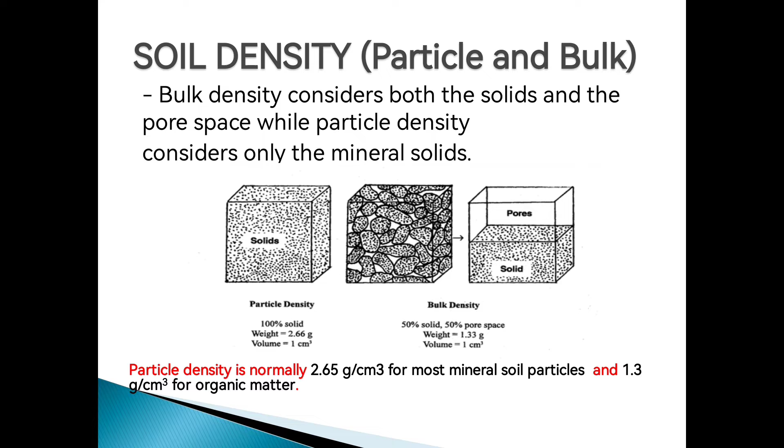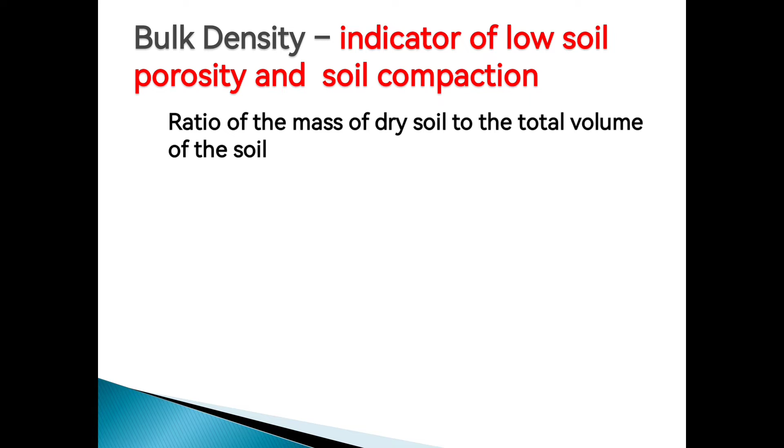So, the particle density is normally calculated as 2.65 gram per cubic centimeter for most mineral soil particles and 1.3 gram per cubic centimeter for organic matter. The bulk density is an indicator of low porosity and soil compaction. This is the ratio of the mass of dry soil to the total volume of the soil. So, total volume of the soil, kasama niya ngayon yung solid spaces at saka yung pore spaces. It is determined by dividing the weight of oven dry soil in grams by its volume in cubic centimeters.

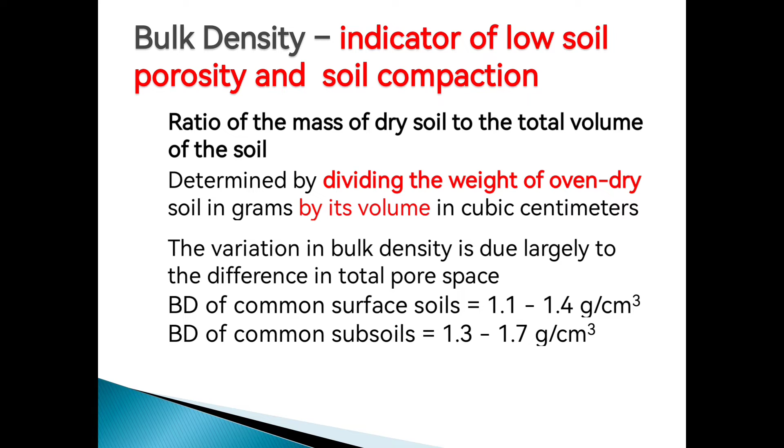And the variation in bulk density is due largely to the difference in total pore space. The bulk density of common surface soil is 1.1 to 1.4 gram per cubic centimeter. Samantalang, as you go deeper, it will be around 1.3 to 1.7 gram per cubic centimeter. So, the more na nagdig ka pailalim, the more na tumataas yung kanyang bulk density, kasi kasama na din dun yung weight na nakapatong sa kanya. So, as you go deeper, your bulk density is going to get higher.

So, ano ngayon yung significance ng bulk density? Bulk density is usually considered in engineering properties, especially pag magpapatayo ka ng mga bahay, ng mga roads. And it is also necessary for the determination of the water movement at saka yung rooting depth ng plants. Kasi pag medyo mataas yung bulk density mo, penetration ng roots at saka yung haba ng roots will also be affected, kasi kung masyadong mataas yung bulk density mo, nagiging compact na yung lupa.

So we know that the bulk density is the oven dry weight divided by the total volume of the soil. So paano ba dinedetermine yung bulk density? We have here the ring cylinder method. This method works best for most moist soils without gravel. So paano nila ginagawa? This is done by preparing an undisturbed flat horizontal surface in the soil with a spade at the depth you wish to sample.

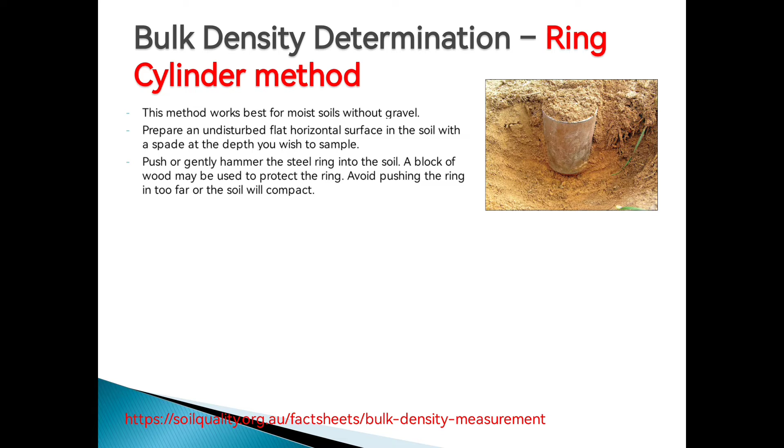And then push or gently hammer the steel ring into the soil. A block of wood may be used to protect the ring. Avoid pushing the ring in too far, for the soil will compact. So wag mong idiin masyado kasi magiging compact na yung lupa. And then you excavate around the ring without disturbing or loosening the soil it contains and carefully remove it with the soil intact.

Remove any excess soil from the outside of the ring and cut any plants or roots off at the soil surface with scissors. And then you pour the soil into the plastic bag and seal the bag, marking the date and location where the sample was taken.

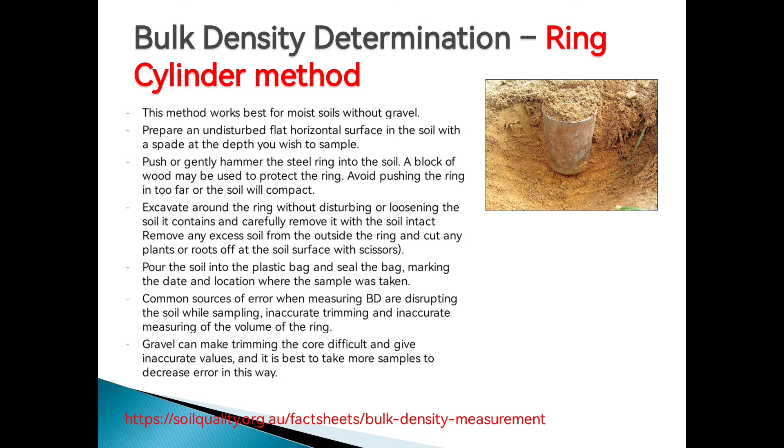And isa sa mga common source ng error when measuring bulk density are na di-disrupt yung soil while sampling. So, ang nangyayari, nagkakaroon ng inaccurate trimming and inaccurate measuring of the volume of the ring. So, gravel, kung may mga bato, can make trimming the core difficult and give inaccurate values. So, it is best to take more samples to decrease error in this way.

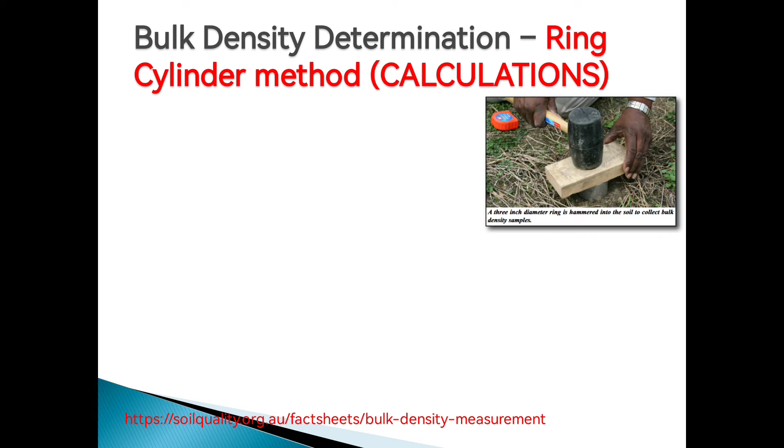Kung yung cylinder method. So, to calculate the volume of the ring, we measure the height of the ring with a ruler. And then you also measure the diameter of the ring and half this value to get the radius. So the ring volume will be 3.14, which is pi r squared, times the height.

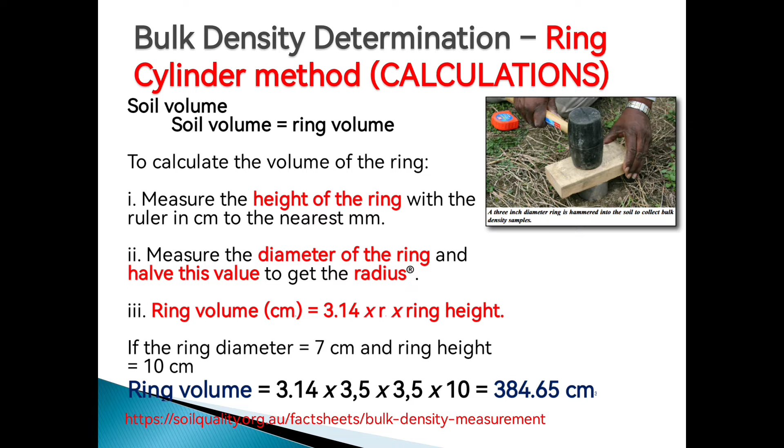So if the ring diameter is 7 cm and ring height is 10 cm, the ring volume would be 3.14 times 3.5 squared times 10, which is around 384.65 cubic centimeters.

So, ngayon, yung lupa na nakuha nyo, you weigh an oven-proof container in grams, so empty, wala pa siyang laman, and then you carefully remove all soil from the bag into the container. You dry the soil for 10 minutes in the microwave or for 2 hours in a conventional oven at 105 degrees Celsius. You let it cool down, and when the soil is dry, you weigh the sample on the scale.

So, since meron na tayong weight in the first time, which is the empty, and then we also have the oven dry weight, so pwede na natin makalculate ngayon yung soil weight. So, we just calculate the second weight minus the first weight. So, meron tayong 425 grams na soil. Assuming na ganito yung value ng weight natin, ha?

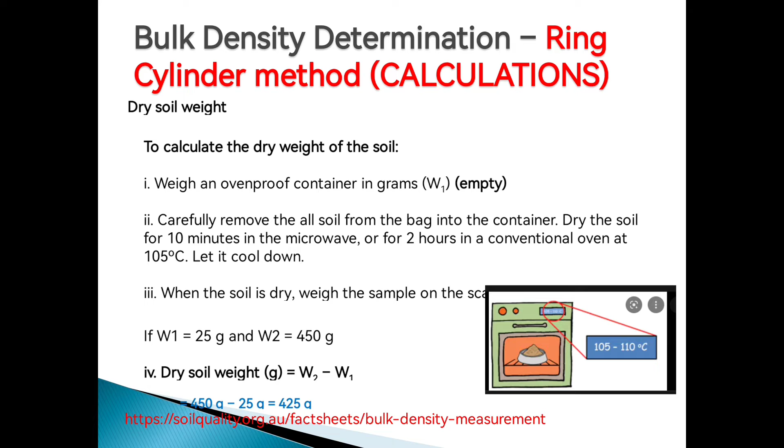So, to calculate the bulk density, we know that it's the oven dry weight over the total volume of the soil. So, for this kind of soil, based sa example natin, our bulk density is 1.1 gram per cubic centimeter. So, this is just an example.

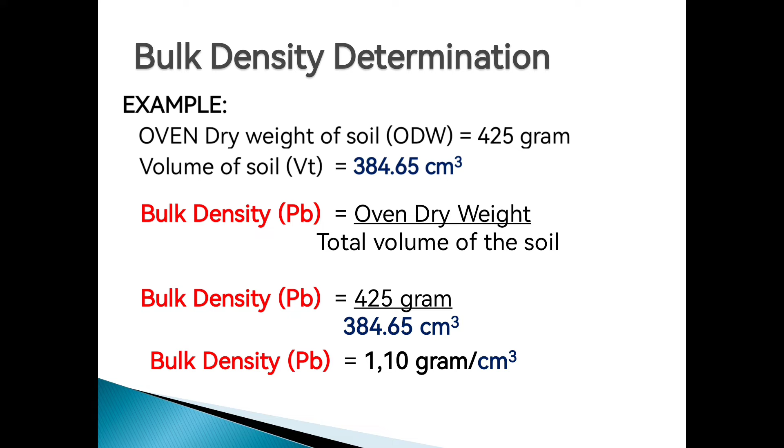Okay, so I hope you follow this, guys. I'm going to show you more calculations later on para ma-practice natin siya. But then, I just want you to know the concept how to calculate the bulk density. So, bulk density is oven dry weight over the total volume of the soil.

And then we also have another method to determine the bulk density, which is the use of a penetrometer. It is an easy and reliable method for determining in-place soil strength and great for checking building pads, excavations, or potential building sites. It simply measures the penetration and you look up soil strength on the strength chart included with the unit. So, itutusok niya lang dyan yung penetrometer sa ilalim ng lupa, and then it will give you information on how strong your soil is.

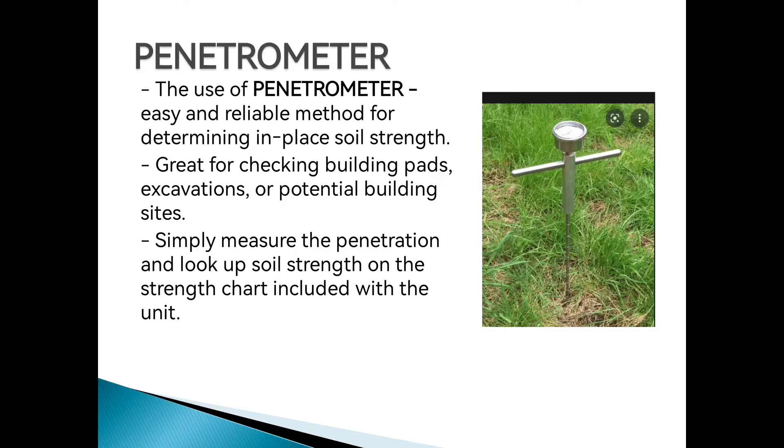And ito naman yung mga bulk densities that restrict root growth. So, ibig sabihin, if you have a sandy soil and your bulk density is higher than 1.8, there will be a problem with your roots, your plants, kasi mahihirapan yung roots mo to penetrate the soil kasi matigas siya. So, sandy is more than 1.8, silty is more than 1.65, and clay is more than 1.47.

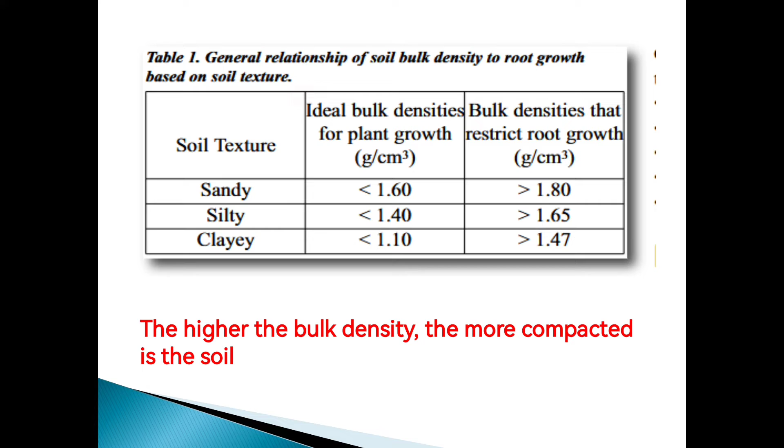So, the higher the bulk density, it will give you an idea that your soil is highly compacted. The higher the bulk density, the greater is your soil compaction.

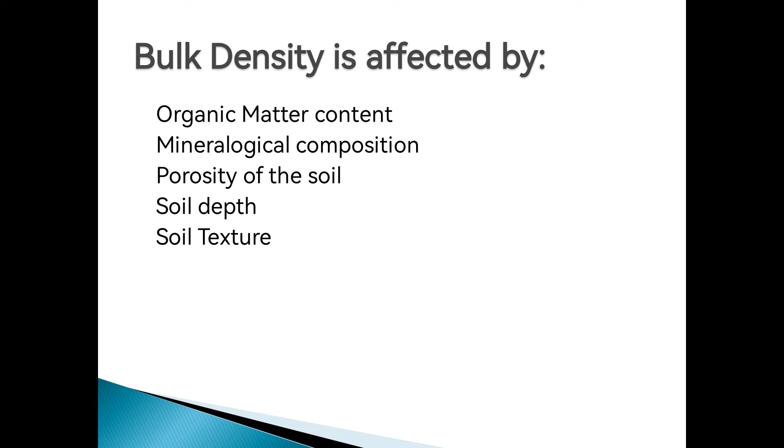So bulk density is affected by organic matter content, mineralogical composition of your soil, porosity, soil depth, and the soil texture. It is dependent on soil texture and the densities of the soil minerals kasi iba-iba yung bulk density ng sand, silt, and clay, as well as ng organic matter particles, at saka kasama na rin yung kanyang packing arrangement.

So as a rule of thumb, most rocks have a density of 2.65 gram per cubic centimeter. So ideally, a medium textured soil with about 50% pore space will have a bulk density of 1.33 gram per cubic centimeter. So yung particle density, guys, mostly standard siya.

Usually yung sa mga calculations natin, ginagamit natin dyan is 2.65 gram per cubic centimeter. So generally, loose, porous soils and those rich in organic matter have lower bulk density. So pag mababa yung bulk density natin, less din yung compaction ng soil. So less compaction, meaning hindi mahihirapan ang roots ng mga tanim nyo to penetrate in the soil.

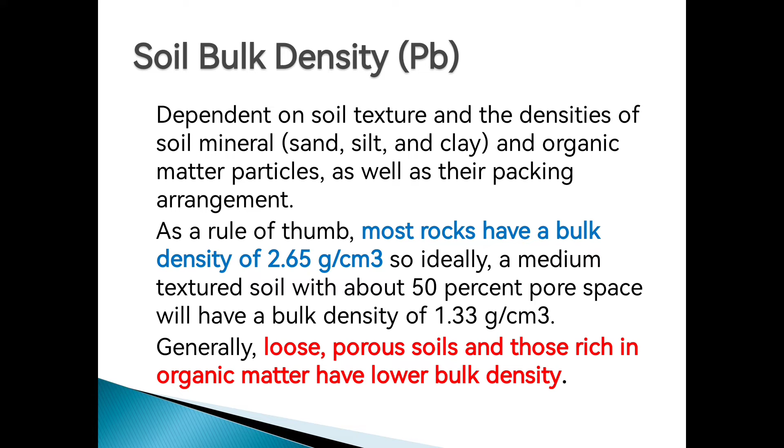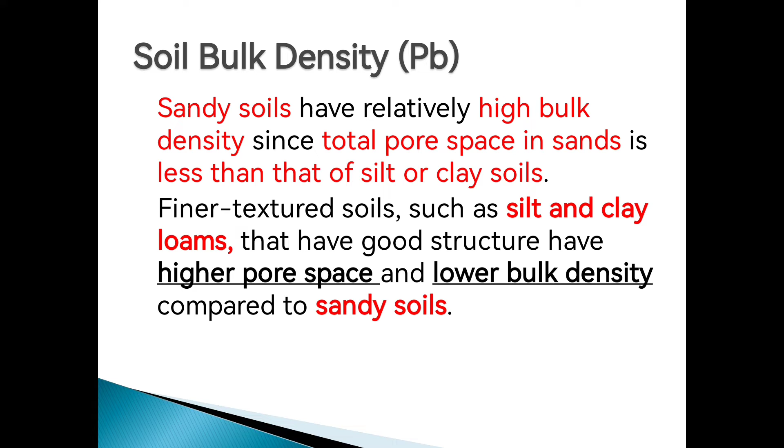Sandy soils have relatively high bulk density since the total pore space in sands is less than that of silt or clay soils. So, mas mataas yung bulk density ng sandy soils. So, mas prone siya ngayon sa compaction ang sandy soils compared ngayon sa clay or silty soils. Finer textured soils such as silt and clay loams that have good structure have higher pore space and lower bulk density compared to sandy soils.

And bulk density typically increases also with soil depth because the subsurface layers have reduced organic matter, aggregation, and root penetration compared to surface layers and therefore contain less pore space. Also, the subsurface layers are also subject to the compacting weight of the soil above them. So, syempre, naiipit din siya doon. So, yung weight ng ibabaw na lupa, nag-a-add din siya ng weight dun sa subsoil. Kaya nagiging mas compacted na yung subsoil mo.

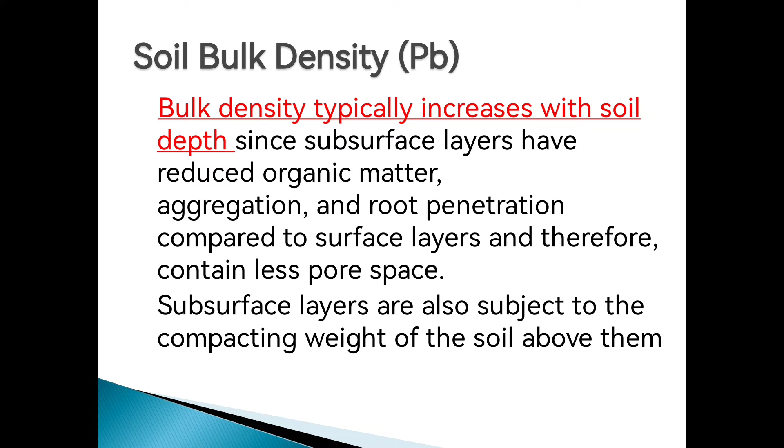And bulk density affects water and air transport in soils, kaya it's very important property ng lupa. And soils with high densities resist water and air transport. And soils with high density may also impede root growth kasi hindi siya nakakapag-penetrate. And a lot of human activities also affect bulk density. So tayo din mismo as mga tao, we also cause the compaction of the soil through our own different activities.

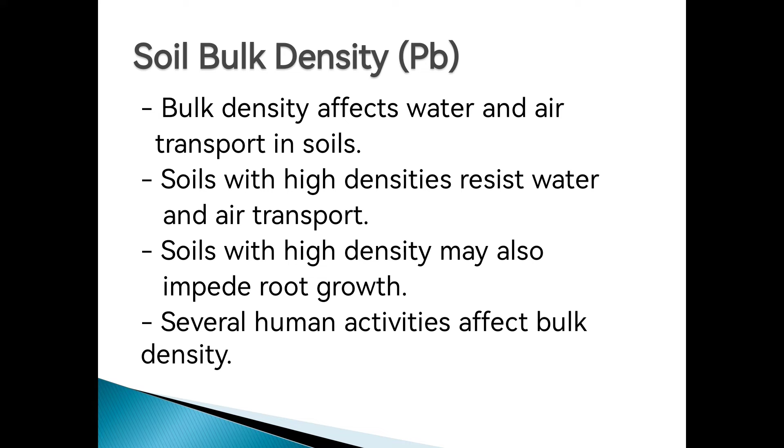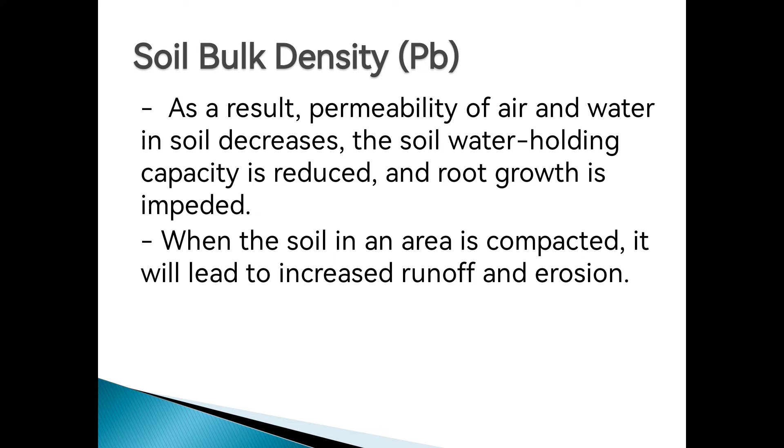Soils at construction sites are generally compacted as a result of excavation, mixing, stockpiling, or equipment storage and equipment traffic. So when soil is compacted, the porosity decreases and bulk density increases. As a result, the permeability of air and water in the soil decreases. So, hindi masyadong nakakapag-penetrate yung air at saka water. And the soil water holding capacity is reduced and root growth is impeded. And when the soil in an area is compacted, it will also lead to increased runoff and erosion. So, marami siyang effect, guys, pag compacted yung lupa.

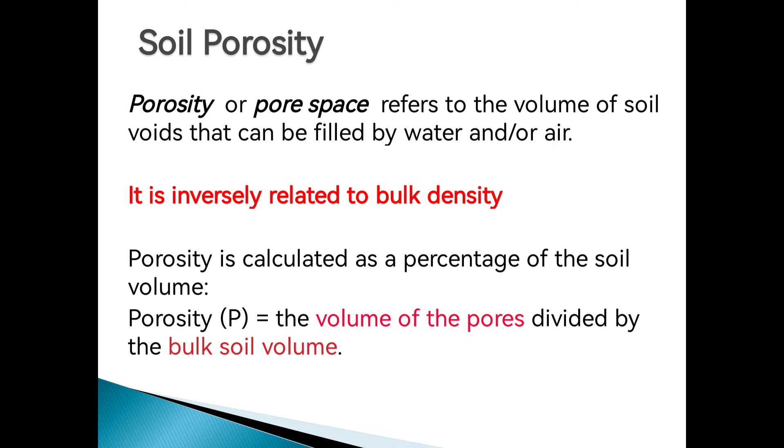Then we also have soil porosity. The porosity or pore space refers to the volume of soil voids that can be filled by water and/or air. It is inversely related to bulk density. So meaning, kung mataas yung inyong pore spaces or percent of porosity, mababa naman ngayon yung bulk density mo. Meaning, less yung compaction mo pag mataas yung porosity. So porosity is calculated as a percentage of the soil volume, the volume of the pores divided by the bulk soil volume. So pore space is very important for providing aeration and paths for water to flow and be stored.

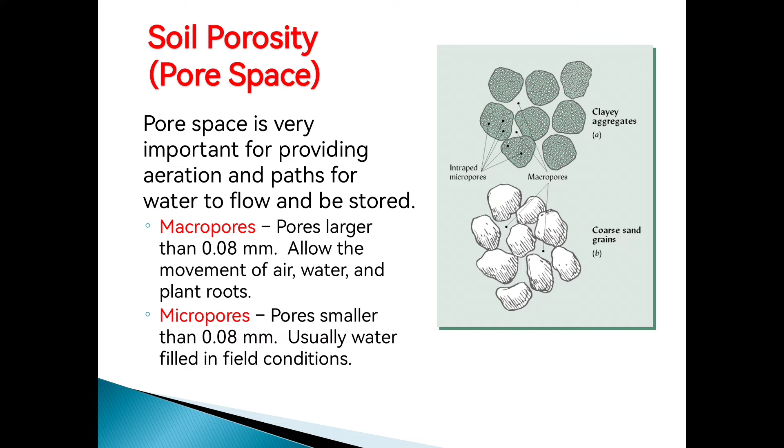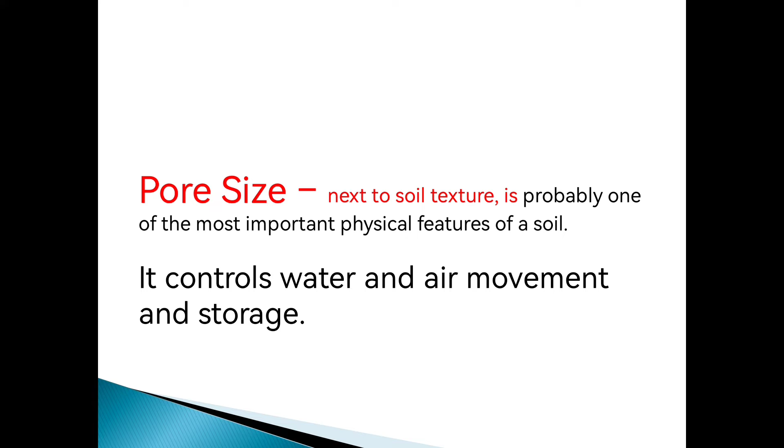So before natin yan sagutan, we are going to compare this pore space in sandy soil versus clay soil. So, imagine a glass baso. Punuin niyo siya ngayon ng sandy soil, sa left side. And then, yung isa namang baso punuin niyo ng clay soil. Kung pupunuin natin yung baso na yan, siguro ilang dampot mo lang ng sandy soils, ilalagay mo siya sa baso, napuno mo siya kaagad. Samantalang sa clay soils, makakailang dampot ka niyan kasi matagal mo siyang mapuno.

It's because the sandy soils have larger pores kasi medyo malalaki yung kanyang mga texture. While yung clay soils, marami siyang mga smaller pores. So, sa sandy soils, there will be less total pore volume, meaning, nagiging less yung kanyang porosity. Samantalang sa clay soil, since maliliit yung kanyang mga pores, there will be greater total pore volume, kasi kahit maliliit yung kanyang mga pores, marami ka namang mga clay materials na nilalagay doon, and each of them have small pores, kaya kung itotal mo lahat ng mga pores sa clay particles, it will create the greater total pore volume. So, mas mataas yung porosity ng clay soils compared to sandy soils.

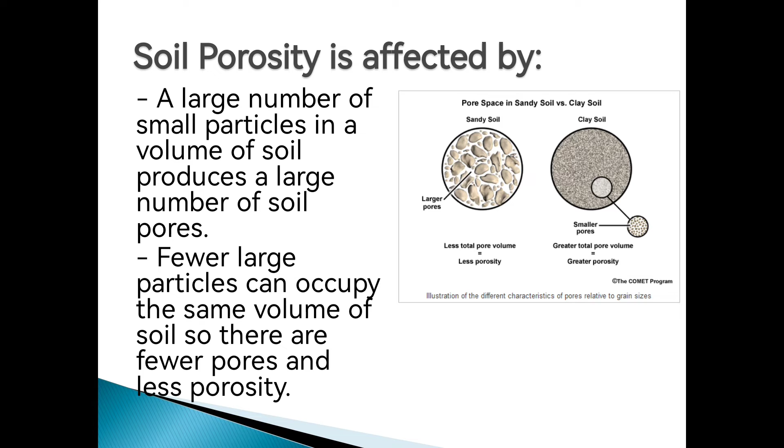So, nasabi ko nga, a large number of small particles in a volume of soil produces a large number of soil pores, and fewer large particles can occupy the same volume of the soil, so there are fewer pores and less porosity. Kaya, mas mataas yung porosity ng clay soil compared to sandy soils.

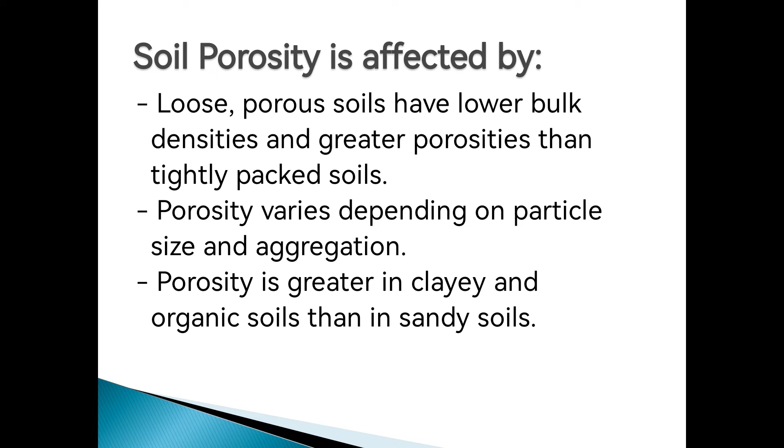So, loose porous soils have lower bulk densities and greater porosities than tightly packed soils. And it also varies depending on the particle size and aggregation, and porosity is greater in clayey and organic soils than in sandy soils. So, paano natin kinakalculate yung porosity? So, this is the portion of soil occupied by water and air. So, both water at saka air.

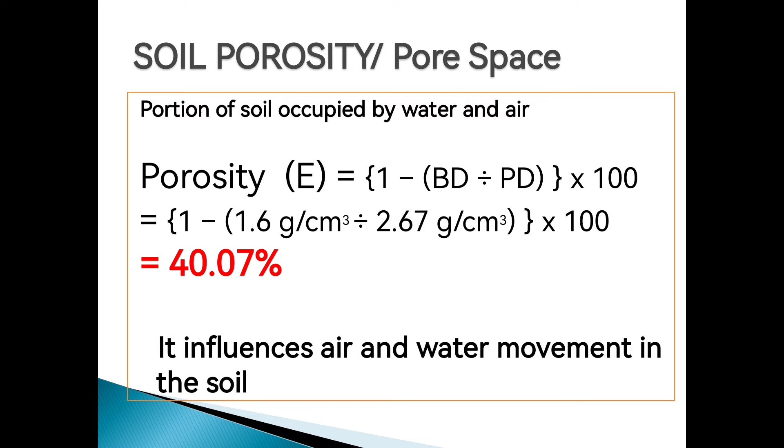So, the porosity, which is usually E, is calculated by 1 minus the bulk density divided by the particle density times 100. So, kung meron ka ngayong 1.6 gram per cubic centimeter na bulk density, you divide it by 2.67 or 2.65 gram per cubic centimeter times 100. So, you will have now a porosity of 40.07%. And porosity influences air and water movement in the soil.

And we also have a bearing capacity, which is determined by soil texture. So this is the ability of the soil to withstand a load or the average load per unit area that will cause failure by rupture of a supporting soil mass. Kaya, in engineering purposes, they usually calculate the strength of the soil at kung ano yung strength ng material na ilalagay mo dun sa soil. Kasi, you cannot just build ilang stories ng building kung yung lupa mo naman is hindi niya kaya ngayong i-sustain yung weight ng building na ipapatayo mo.

So, they also do stabilization. Soil stabilization is a method that prevents a soil system from moving under a load. And the compaction is also very important because it increases the density, thereby increasing stability, and usually applies large pressure to soil at optimum moisture.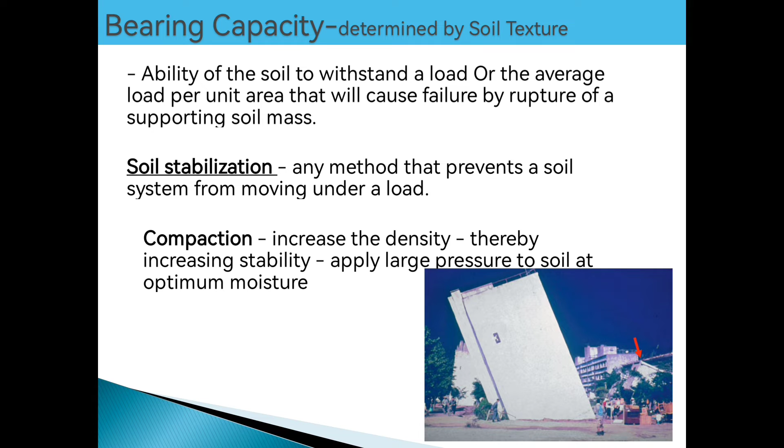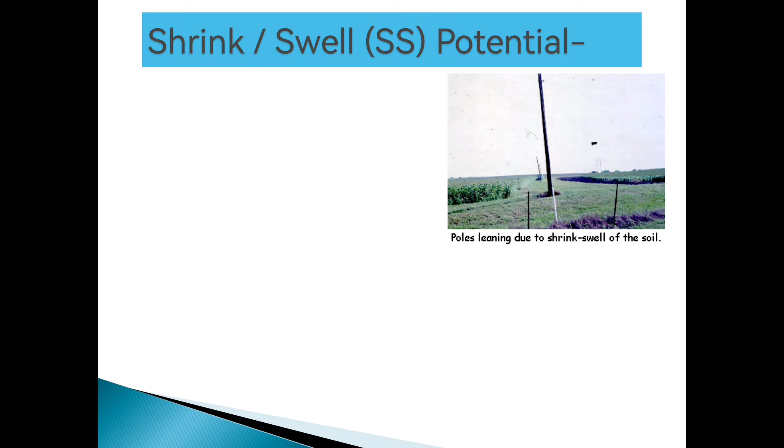And we also have the shrink swell potential. We abbreviated it as SS because may mga iba't ibang lupa, particularly some kinds of clay, has the high potential of shrinking and swelling. So, yung iba dyan nagka-crack. So, kaya it's very necessary to identify anong klase ng lupa ang meron ka, especially kung you are going to build a lot of high-story buildings dun sa lupa na yon.

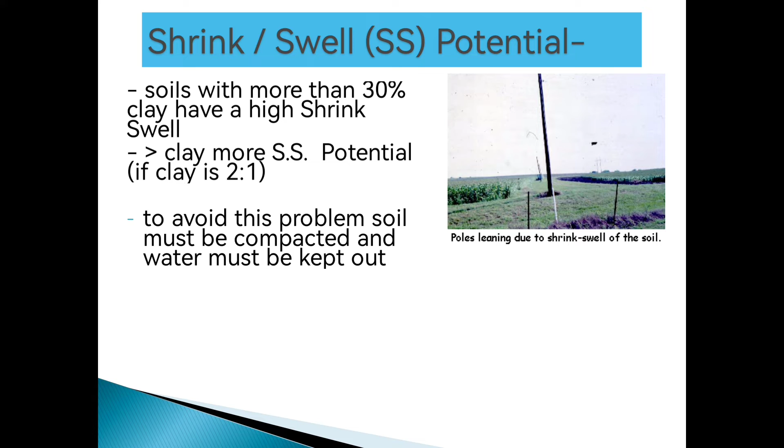So, soils with more than 30% clay have a high shrink-swell capacity. Ibig sabihin, pag mataas yung clay content mo, mas mataas din yung shrink-swell potential, lalo na pag yung mga clay mo is 2:1 expanding type. And to avoid this problem, soil must be compacted and water must be kept out. And without the above, shrink swell will crack foundations and pavement or move telephone poles.

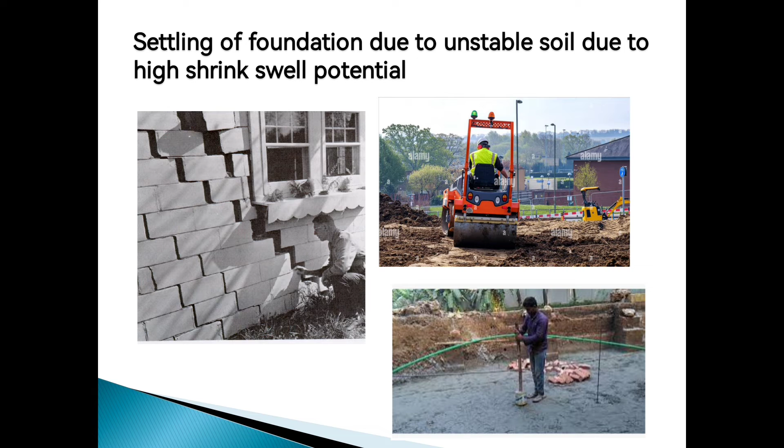So, soil stabilization is a process by which a soil's physical properties are transformed to provide long-term permanent strength gains. It is accomplished by increasing the shear strength and the overall bearing capacity of the soil. And how to do this? They apply lime, cement, Portland, and pozzolan with high silica volcanic ash as chemical additives. And the lime is the most effective on clay soils and can be used in combination with cement and pozzolan.

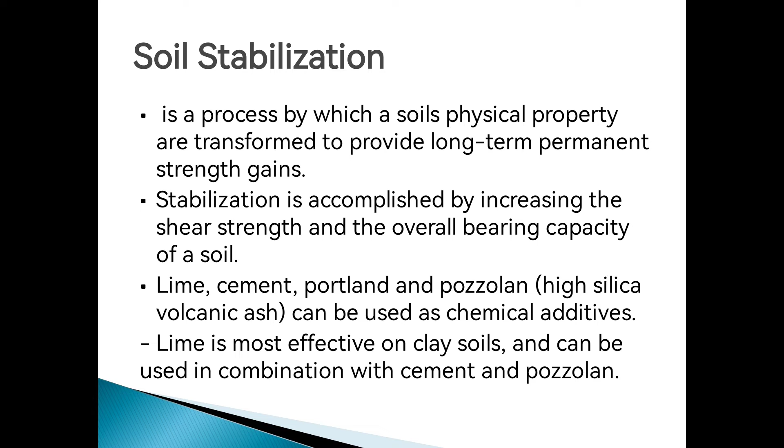But then, this is true, by the time builders had finished the third of the 8 planned stories, about 5 years later, the tower's foundation had begun to settle unevenly on the ground beneath it, which is a dense mixture of clay, sands, and shell. And as a result, the structure had begun to tilt visibly towards the south.

So they did a lot of efforts to strengthen and make that structure stable. But even after many years, it was not solved. And so now we just have the Leaning Tower of Pisa in Italy.

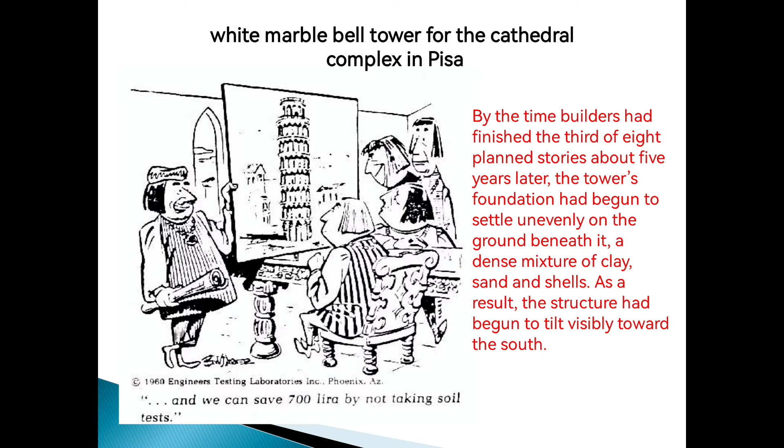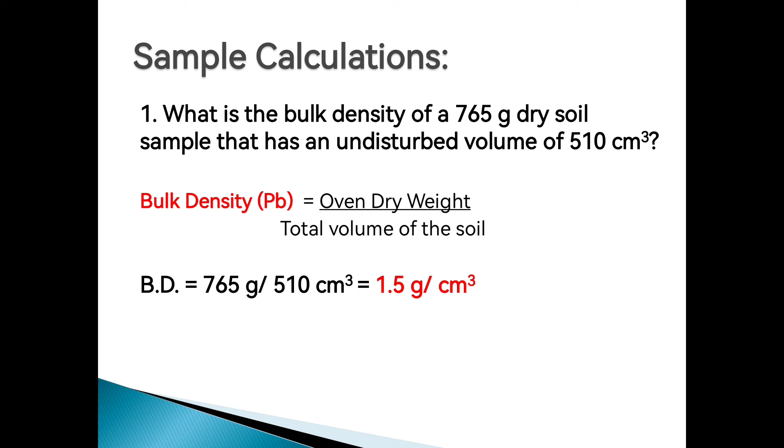So these are some example calculations to review how we calculate bulk density and porosity. Question number 1: what is the bulk density of a 765 gram dry soil sample that has an undisturbed volume of 510 cubic centimeters? We know that bulk density is calculated as the oven dry weight over the total volume of the soil. So we divide 765 grams of dry soil by 510 cubic centimeters. Our bulk density is 1.5 grams per cubic centimeter.

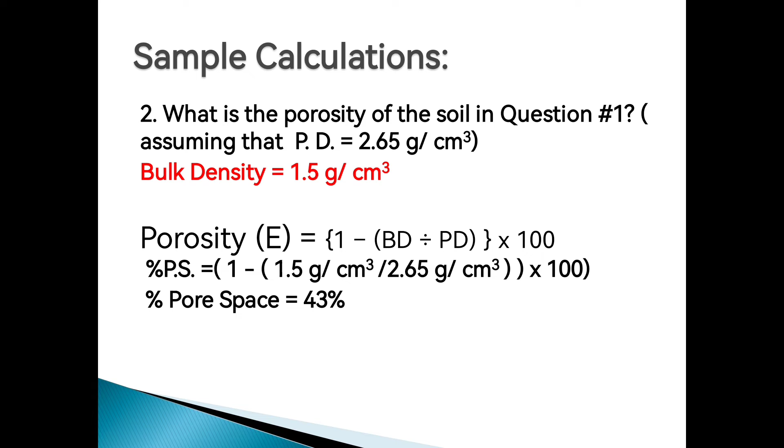Second problem: what is the porosity of the soil in question number 1, assuming that the particle density is 2.65 grams per cubic centimeter? Porosity is equal to 1 minus the bulk density divided by the particle density, times 100. So it would be 1 minus 1.5 divided by 2.65 times 100. So the pore space will be 43%.

Question number 4: compaction by tillage implements changes the bulk density from 1.2 to 1.7 grams per cubic centimeter in a portion of the root zone. That means, from 1.2 it became 1.7. That means the soil is becoming compacted because its bulk density is increasing.

The questions are: what was the initial porosity? What is the compacted porosity? And what percent of the soil's porosity was lost due to compaction? To solve the first question, initial porosity would be 1 minus 1.2 divided by 2.65 times 100%. The initial porosity is 55%. And the compacted porosity is 1 minus 1.7 divided by 2.65 times 100, which is 36% porosity.

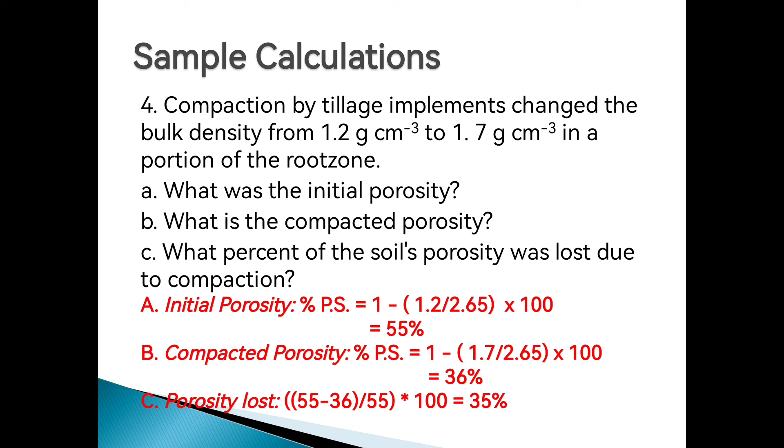That means the initial porosity is 55%. But when the soil gets compacted, its bulk density increases and its porosity decreases. So from 55 it becomes 36%. Then, what is the porosity loss? We take 55 minus 36, divided by the initial porosity, times 100. So the porosity loss is 35%.

And the last but not the least problem: during construction of new golf greens, workers use an 8 to 2 sand to peat mix. If they're mixed, that sand to peat mix has organic matter. If their mix has a mean bulk density ranging from 1.17 to 1.42 grams per cubic centimeter, what is the porosity of a golf green made from this material?

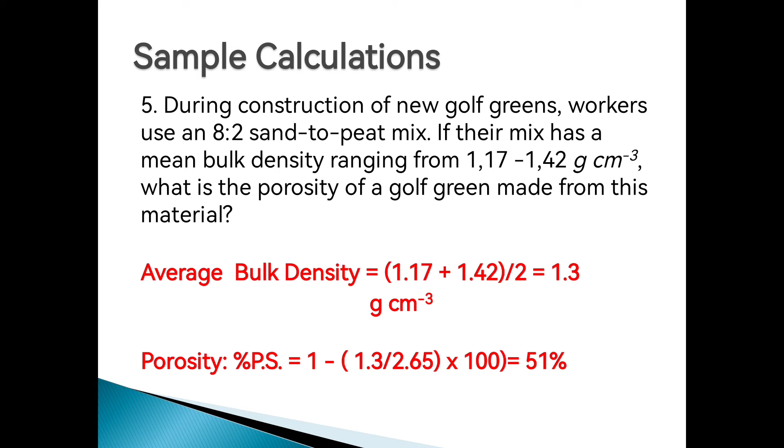First let's get the average bulk density: 1.17 plus 1.42 divided by 2, giving an average bulk density of 1.3 grams per cubic centimeter. Then we calculate the porosity using the formula, and we get a porosity of 51%.